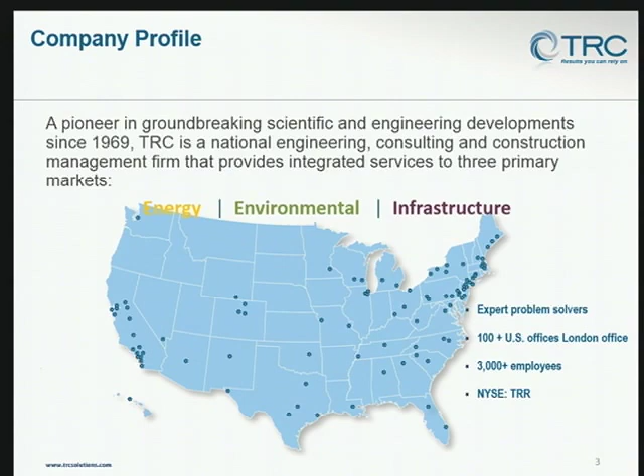3,000 people. Mission, vision, and values — always, safety is number one. I'm going to skip over the rest of this in the interest of time, and get to...

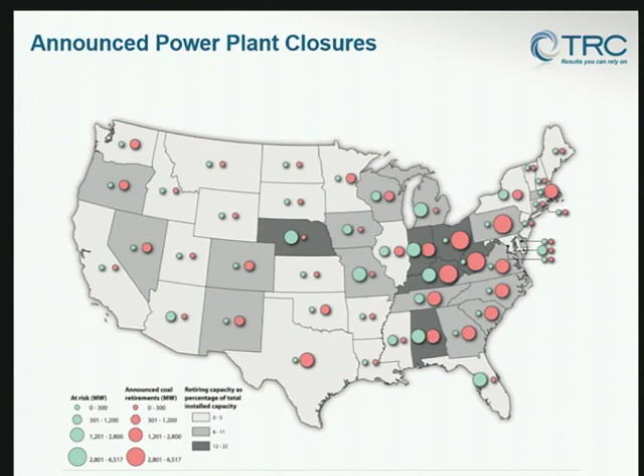Announced retirements of power plants. So virtually every state in the country has got some closures. These markets started on the West Coast and on the East Coast and in Texas, where there were oil burners. Economics is a major driver. Oils are more expensive than coal or gas, so the oil plants got closed, tended to be closed first. The market is 150 sites, more or less — that number has stayed constant over the last 2 or 3 years. 500 units, so a unit is a boiler and a turbine, and a site is a site.

If you use EPRI's decommissioning numbers, 15 to 20 million a site, it's a $2 billion market, which means it will cost the utilities or the owners of those plants something like that to get through the process of decommissioning, should they do that. Economic drivers are gas prices and heat rate. The heat rate in a coal-fired power plant is 10 or 11,000 BTUs a kilowatt hour. I think the Siemens turbine is down below 7,000.

So there's technology drivers, there's a cheap gas driver, and there's, of course, regulatory drivers, which we have tended to focus on. But the thing that's causing these plant closures is cash. As a friend of mine likes to say, the answer is cash — what was the question? The peak closure years, and by closure I mean shutting plants down, likely to be 2015-16, coincident with the MATS deadlines for compliance. And all these plant closures are a major driver of transmission projects throughout the footprints that they serve.

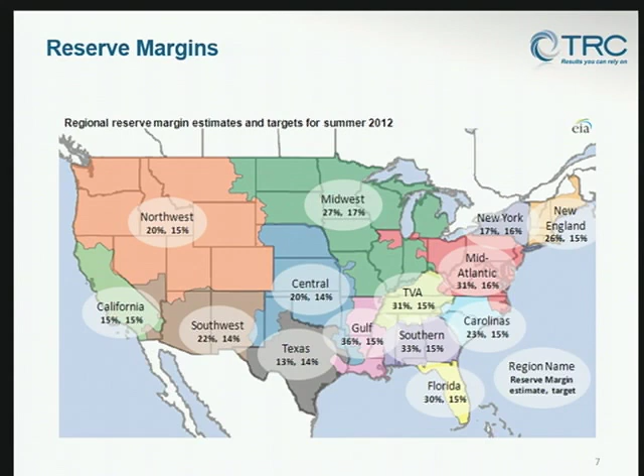Just a word on reserve margins. A lot of discussion — what are we going to do without the 35 or 50 or 70 gigawatts of power? Reserve margins are pretty significant in most regions of the country, with the exception of California, Texas, and New York. When all the coal plants close, gas goes into curtailment, greenhouse gas kicks in, these numbers are going to change. But right now, the reserve margins are significant, with the exception of California, Texas, and New York. Transmission system impacts.

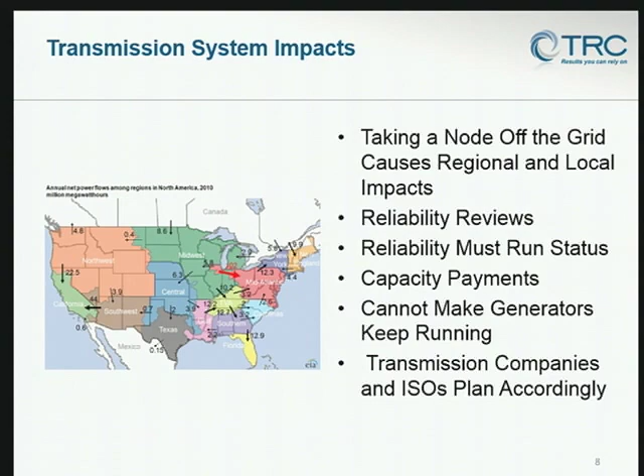Transmission companies and ISOs plan accordingly. So we do a lot of transmission work for investor-owned utilities, and every once in a while they'll complain, 'Oh my, such and such a plant is closing, we have to spend $100 million to upgrade the grid so that the customers have reliable service.'

Polar vortex. I had the good fortune to be on a plane from New York to D.C. to Columbus and back to Philly during the polar vortex, and every single one of these old oil burners or coal plants was running, and running hard. So, of course, after the rules kick in, they may not be able to do that. So people say, well, what's going to happen?

There were planned outages of something like 35 gigawatts of capacity that could have been running, but they had planned closures, so they were not running at that time. That's probably a good thing. The capacity was out there; it just wasn't available at that time. That could be solved by better planning.

Gas curtailment. That's a tough issue. If residences need the gas to stay warm, how do you get gas to power plants if the residents are using all the capacity? That's a gas pipeline and storage issue.

The utility markets and the commodity markets, gas went from $3 or $4 or $5 up to $100. Now there was a cap of something like $20, and people in the market said, well, they can't go through the cap, and the traders said, you want the gas? It's $100. You don't want the gas? It's not. Don't take it.

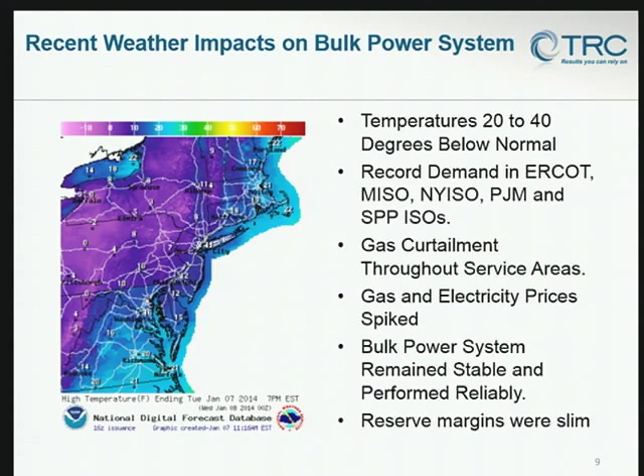You can't say it's not going to happen again. It could happen in the summer. It could happen in the winter. But there's work to be done there.

111D rules we've heard a lot about. I'm going to skip over this slide.

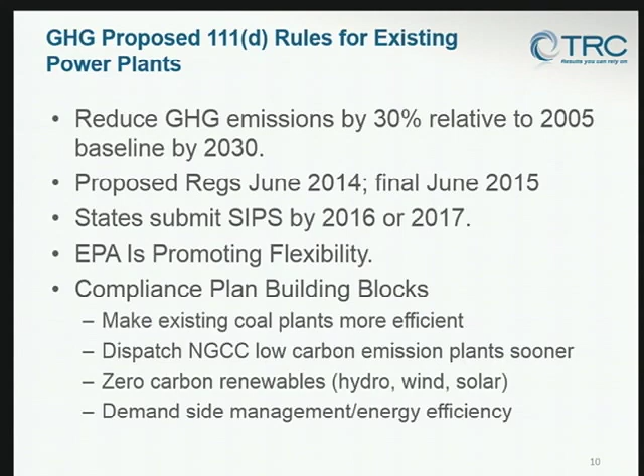And I want to talk about our repower initiative. TRC has been in this market of transforming aging power plant sites since about 2001. We entered into a contract with Con Edison to close a plant in New York City. It was really a real estate deal as part of a big insurance contract, and that was the first one we did. It was a great project for everybody.

It was a big real estate transaction. It was a big contract for us. There was development on the back end of it, so all the pieces fell into place. And since that time, we have done 22 projects in one form or another: 15 as an owner's engineer, 5 as a prime.

One of them was interesting. It was a mercury boiler up in Connecticut. Those are all finished. There's a whole other series of projects where we're acting as the owner's engineer. Some of them are in progress. Some of them are new.

We tend to package the deliverables into 3 or 4 different buckets. The first deliverable we call a playbook. Other people might call it a basic engineering package or a front-end package, but what we try to do is get the existing information that the owners have into an organized format so they know what they have, and then we'll go through an analysis and give them scope of work, cost estimate, schedule for reasonable scenarios that the clients might be interested in, and that can be done in 2 or 3 months, and the results are useful for decision making.

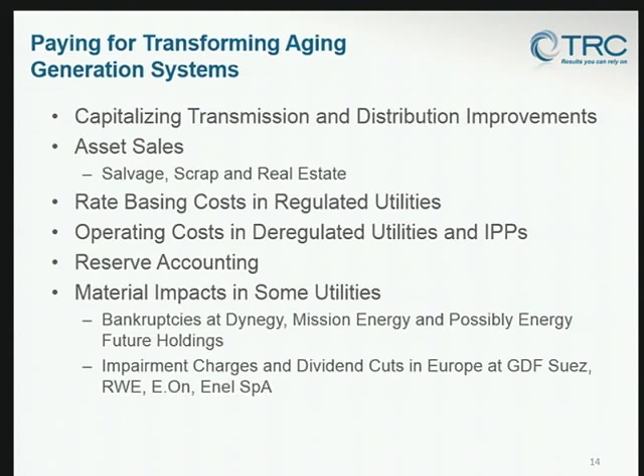So just to drill down into a little detail, playbooks are based on these TRC deliverables for power plant closure projects. Playbooks tend to be a $120,000 contract, taking 2 or 3 months to execute based on existing information.

We'll look at available asbestos and hazardous materials information, transmission and other utility issues, and asset valuation. We develop a matrix of permits required to close the site and/or keep operating it, depending on what you're interested in doing, along with a phase 1 environmental site assessment, and we look at constraints on means and methods.

When a plant is being taken out of service, there are always four impacts: noise, dust, vibration, and trucks. If any of those issues constrain means and methods—whether you blow it up, pull it over, or pick it with a crane—you may not be able to use all of those methods, or use them on the entire site. So we look at those constraints, since they always affect the price and the schedule.

We look at community impacts and future use scenarios, which is always very important. If there are realistic scenarios, we develop them into cost estimates and schedules so you can make an informed decision about what to do next. These kinds of packages are useful for groups like boards of directors or public service commissions so they can see where the costs are coming from.

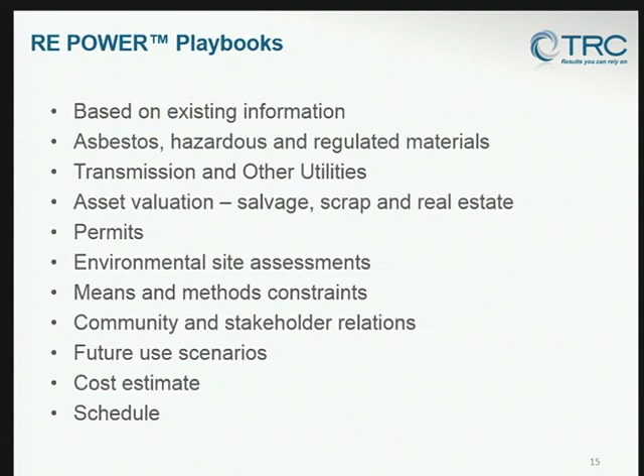The next level of detail is what we call engineering during decommissioning. There needs to be an asbestos survey, and it's helpful to have a hazmat survey. If you don't do those things, you can assume everything is asbestos and pay an abatement contractor to treat all the insulation as such, or assume nothing is asbestos and pay for change orders when you find it. Neither of those is desirable, so we always recommend a thorough asbestos and hazmat survey.

We develop a set of plans and specs for abatement and demolition, and give that to our clients as a bid package. Going down the road, there need to be some work plans, and there are permits that you need to get.

We think it's always good to engage the community and tell them what's happening. They may not care, or they may care a lot, but most communities like to be informed. We do that through fact sheets, websites, and presentations. Putting information up on a website is really great for people who worry a lot—if they want to know what's happening, they can just log in and find out.

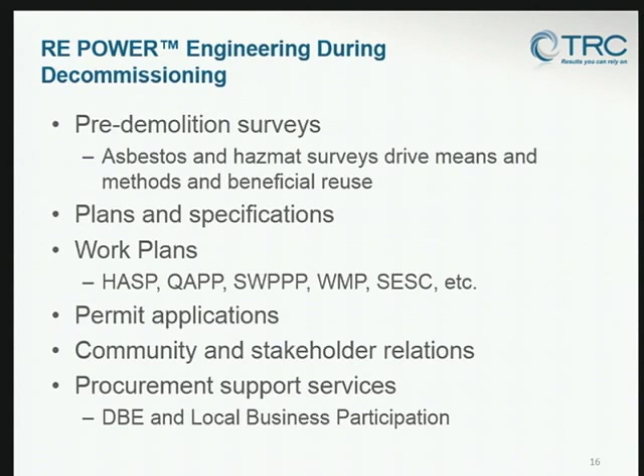Construction support services, this is something the owners can do themselves, they can hire a contractor to help them with it, or they can do it together. But it's really difficult to just turn a site over to a demo contractor and let them have at it. They're going to do what's good for them. They may not do what's good for you.

But project management, site management, contract administration, change management, health and safety inspections, environmental inspections, and at the end of the day, you may need a document package to record what was done on site, trucking manifests, air monitoring, asbestos monitoring, and so on and so forth.

Something else that needs to be done, and then asset recovery is the one issue that seems to consume more time than anything else during the bid process. What we tell people to do is think about what you would pay for the salvage equipment that's available on site. Some of the equipment, air compressors, fire water pumps, house boilers, control systems, what would you pay for it if somebody else had it for sale?

So the best market seems to be internal within the companies. If there's no market for this kind of equipment in-house, it's probably not going to be much of a market out in the marketplace. There are auction houses, I call them like garage sales, and people literally come in and say, I'll give you $5 for that warehouse full of spare equipment. It's really a tough and frequently disappointing exercise. There's a lot of litigation with auction houses.

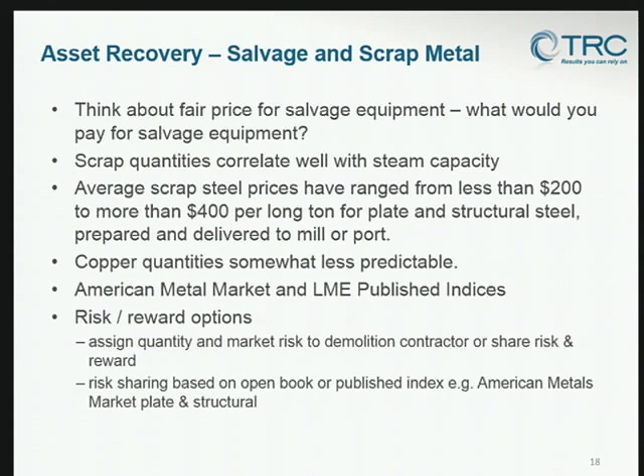I'm going to go through some projects, and I think we're okay on time.

So this is an old slide that I've given many times in these kinds of presentations, but this is a Con Ed site in New York City. It was on First Avenue, just south of the United Nations, to give you an idea of where it's located. This was an MGP site, then a coal-fired power plant, then an oil-fired power plant, and finally it was converted to gas before it was closed in 2000. Well, it was supposed to close in 2003, but they didn't close it until 2005. It was actually two power plants, 3 million pounds an hour of steam.

And there's been some development on the site. There's a school and a couple of apartment towers, the school is in session, the apartment towers are in construction. The other development has lagged, not for any particular reason.

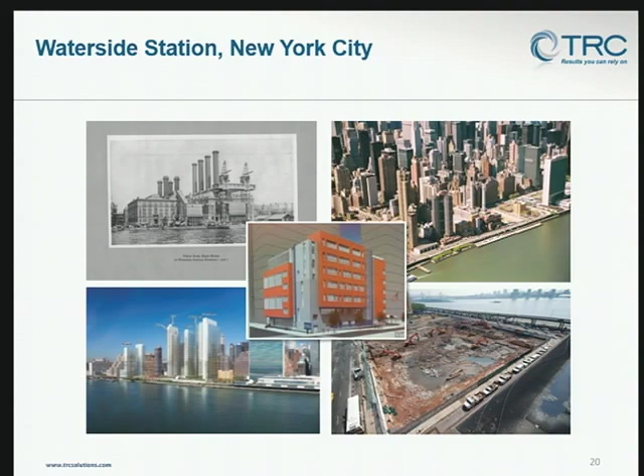One of the other interesting things about this site is there were 7 intake and discharge tunnels, which were very deep, and the top of the tunnel was always below the level of the East River, so they were difficult to get out. We said, hey, we'll close them in place. They said, well, we want to build skyscrapers, we don't want to deal with these old tunnels, so take them out. So we took them out, but it was tough, tough to get out tunnels that are underwater.

Hunters Point and Humboldt Bay, San Francisco. Here again, these were oil-fired power plants.

In California, there's always the dirtiest plant in California. Hunters Point is on the waterfront, part of a huge redevelopment zone.

It was 400 megawatts. PG&E broke it up into pieces: above ground demo, below ground demo, and then cleanup. You can do that, it just takes longer, it costs more. So we were the prime on this. We did the engineering, we hired the subs. The project was done in 2010.

Humboldt Bay is up at the end of the line in Eureka, California. This was an oil-fired plant and a nuclear plant. We did the thermal plant. They just awarded a contract for the nuclear side last year. I guess that's going to also be closed.

No future use at this time, but the San Francisco site is part of a very, very large redevelopment area.

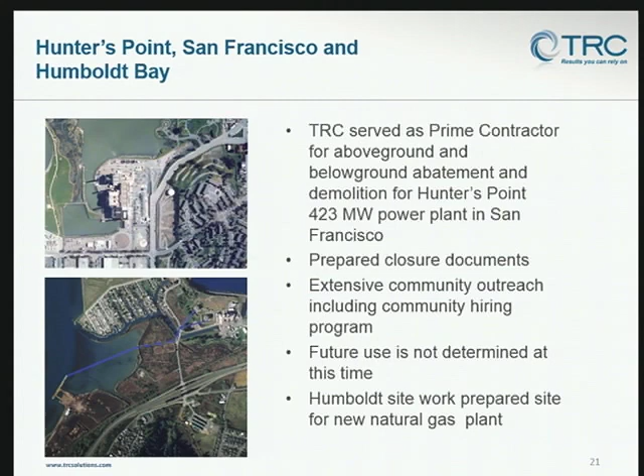Austin, Texas. So this was a plant, 570 megawatt power plant in the city of Austin in an environmental justice neighborhood. People have been trying to close this plant for many, many years. In 2007, Austin Energy, a municipal utility, finally said, okay, we agree, we're going to close it.

So we won this competition, and there were a lot of requirements. It's finished. It was finished the end of last year.

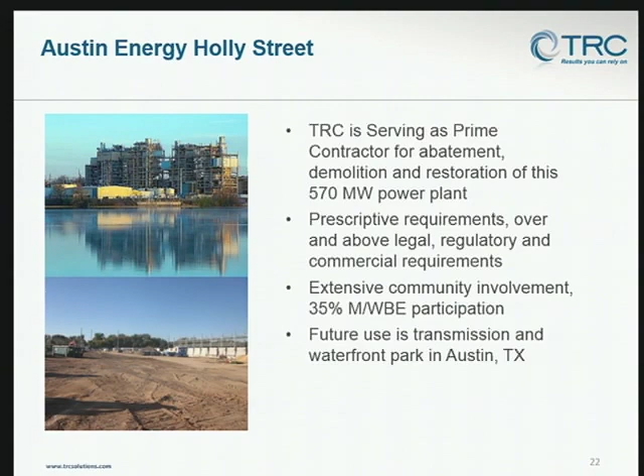The lesson on this plant is what happens if you have a bad asbestos survey. Containment went up, clearance was granted, containment came down, and then we peeled the skin off the boiler and found, guess what, lots of asbestos. That created a delay and a change order, but there's a need for a thorough asbestos survey on these projects. Big DBE component, 35%.

Contractors, they were all great. We're going to talk about Long Island, which is, of all places, kind of a laboratory for repowering. Right now there are 5 projects on the island in play in one form or another.

Glenwood Landing had 200 megawatt towers and then these old Riley boilers in the brick building. This side is being demolished at this time. There are peregrine falcons, there are state historic preservation issues. Just because you say you want to do it doesn't mean you can go ahead and do it. You've got to deal with all these ancillary issues that pop up.

It's almost done. The driver on the Glenwood Landing site was property taxes, which were north of $20 million a year. Same thing on Barrett and Port Jeff, and for the time being those taxes could be passed back into the rate base, but that was going to end. So there was a need to close these facilities and get them taken down on a time schedule.

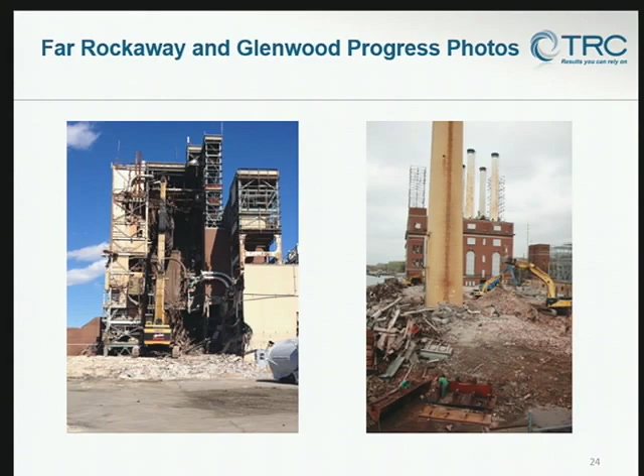Then there's Poletti. It was sort of a bargaining chip. This is an 850 megawatt plant that Con Edison started to build in the 70s, sold it to the New York Power Authority, a state institution. Governor Pataki wanted a state-of-the-art, air-cooled condensed, gas-fired combined cycle power plant, and the environmentalists in New York State said, you want a new plant? Close the old plant. So there was an agreement struck to do that.

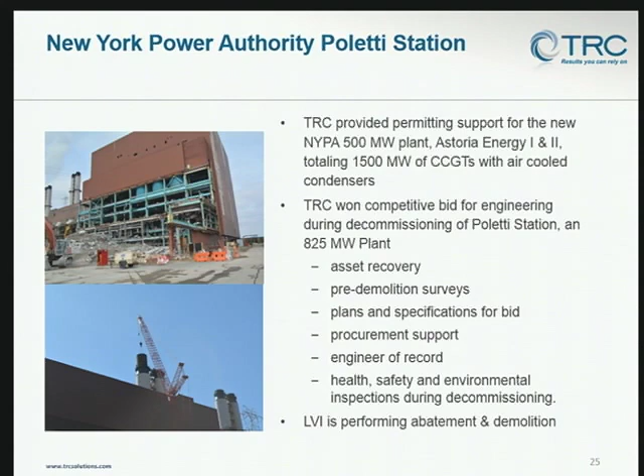The new plant's been up and running for quite some time, and whenever it's available it just runs flat out. The old plant is currently being demolished. Probably be done in the 4th quarter of this year.

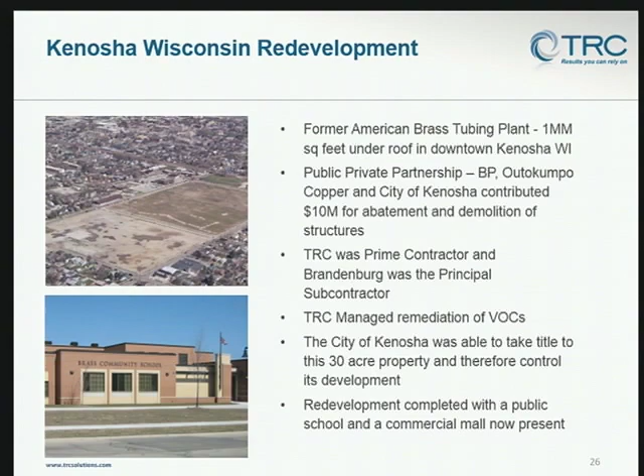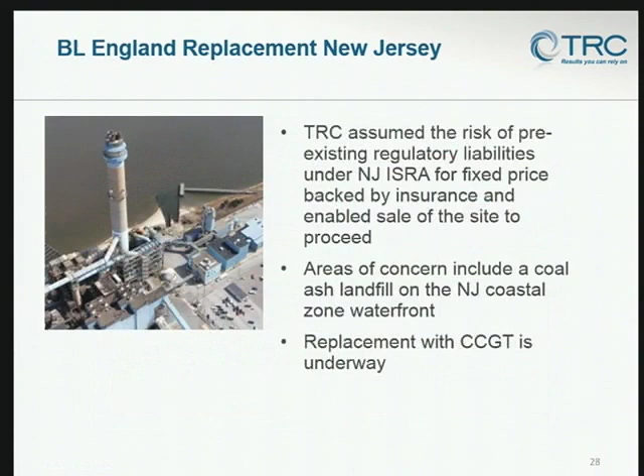That's all I got. These are some other example projects. Anyway, if there are any questions, I'm happy to answer them, and we'll keep this show on schedule.

Thank you. Any questions? I'll be here. Looks like you'll get a question maybe at the break. Okay, great. All right, thank you. Fair enough. Thank you, Ed.

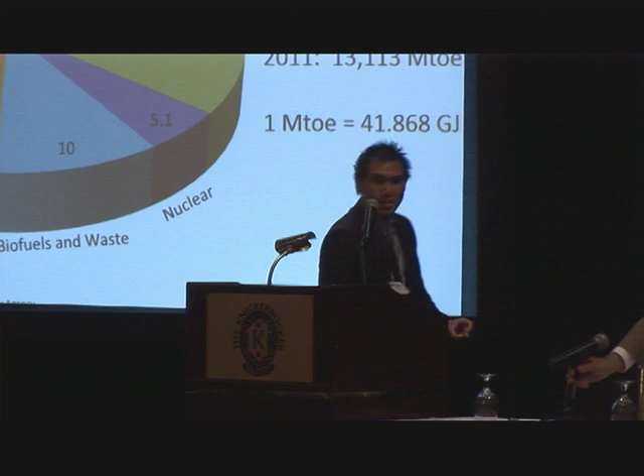So chemical looping is an interesting technology. This presentation will differ from all previous presentations because chemical looping is still most definitely a technology that's being developed, but every sign does show that it can lead to commercial scale demonstration operations. Currently, as all these chemical looping projects occurring throughout the world continue to scale up successfully, this technology does have the ability to completely transform how fossil fuels are utilized.

First, though, it's important to take a global perspective of how energy is consumed. If you take a look at this chart, it's very obvious that fossil fuels dominate our primary energy source. Given the current portfolio for energy - oil, natural gas, and coal - comprising about 80%, it's very clear that for the near future, fossil fuels, carbonaceous fuels, will continue to dominate. The world is not decarbonizing our energy, and we aren't shifting towards renewables to any great extent.

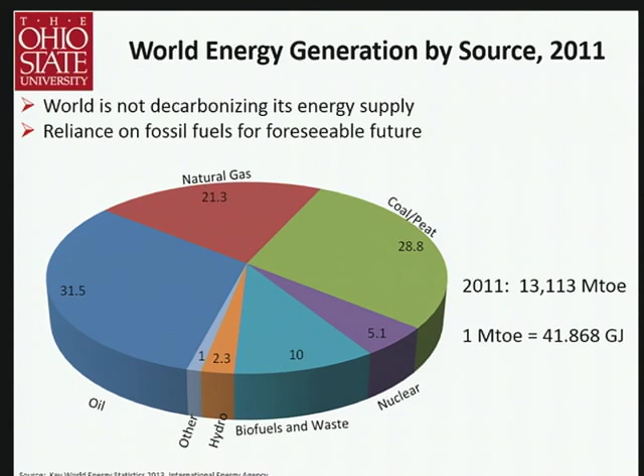Now, I realize that CCS, CCUS, CCGS, CCUGS, whatever you want to call it, is not a viable option for reducing CO2 emissions in its current state due to economic challenges and difficulties. However, that doesn't mean that in the future it can't be or won't be, as research continually develops and advances.

So everyone here knows the purpose of CCS. Tom and Jordan did a fantastic job yesterday going over the details of what the DOE is doing in terms of CCS. But the overall strategy does require government regulation and technological advances in order for CCS to be viable. In terms of government regulation, the US EPA mandates and proposals have been discussed in great detail. But internationally, the European Union has also set up the emissions trading system for CO2.

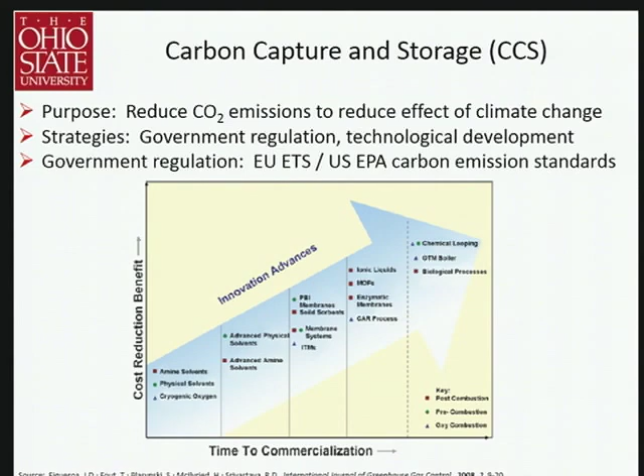So now, what is chemical looping? It's simply a cyclical process where a chemical reaction is divided into several subreactions using intermediates. There are two types. One is purely for CO2 removal, and the other uses a metal oxide carrier particle for oxidation reduction. In terms of CO2 capture, it's typically a metal carbonate, typically limestone. It's calcined, and then a pure stream of CO2 is emitted, while the metal oxide reacts with the CO2 in the flue gas to form the metal carbonate, and the cycle continues.

In terms of the redox cycles, what happens is a metal oxide reacts with the fuel, and depending on the metal oxide composition and the reactor type, you can get a variety of products, including syngas at any hydrogen to CO ratio you want - you just need to play around with the particle, play around with the fuels. You can get electricity through complete combustion, you can get hydrogen, you can get liquid fuels. It just depends on how you decide to set up your reactor system. What you see is just a complete redox cycle between the metal oxide and the reduced metal.

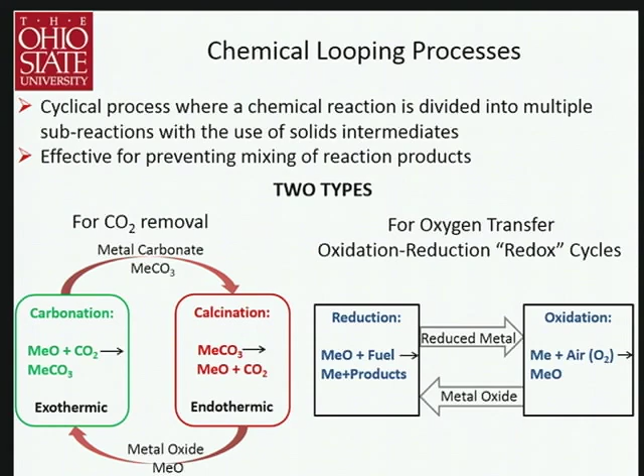The main benefits - there are several of them for chemical looping - is that it is an inherent CO2 capture technology. You don't need an amine scrubber, you don't need any back-end sort of CO2 removal system. It by itself is inherently a CO2 capture technology.

It provides a highly efficient method for coal and natural gas utilization, where efficiencies can range between 50% and 80%, depending on what products you want.

It's fuel flexible. Throughout research throughout the world, it has tested biomass, coal, natural gas, lignite, pet coke. Everything has been tested. And it's also product flexible, where if you want syngas at any hydrogen to CO ratio you desire, it can be achieved. You can produce electricity and value-added chemicals.

The challenge is the particle development. The greatest barrier and the number one failure for chemical looping systems is the particle. DuPont had a maleic anhydride chemical looping system, but it failed because their particle, over time, failed to continue to provide the oxygen, so they just eventually ended up using an ASU.

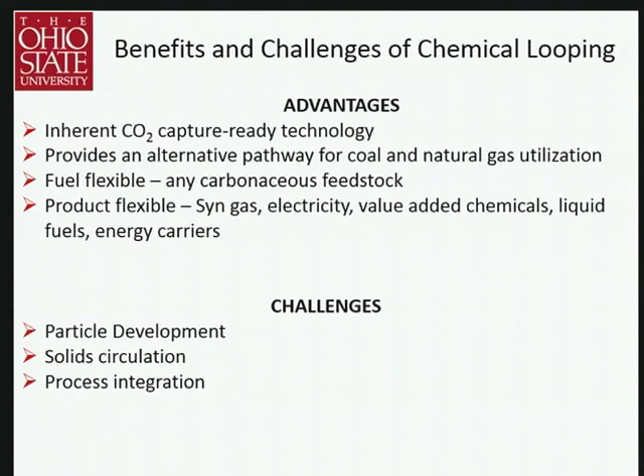The idea of chemical looping isn't a new idea. In the 1900s, the Lane and Messerschmitt process was actually a chemical looping system for hydrogen production, very similar to what we are using today for our hydrogen production as well in a chemical looping system.

The first reaction, the top one, is simply the steam iron process. The bottom reaction is the reduction of Fe3O4 back to Fe using CO. The net reaction you can see is a water-gas shift reaction, but since you broke it into two intermediate reactions, there's no need for a water-gas shift catalyst. There's no need for breaking the equilibrium or trying to shift the equilibrium, because there is none. It's inherently performed through the chemical looping system.

And then in the 1970s, Consol Energy had the CO2 acceptor process, and what they were trying to do was use calcium oxide both as a CO2 carrier such that the water-gas shift reaction could move in the forward direction. Plus, since it came from the calciner, which was at a higher temperature than the gasifier, the calcium oxide also provided heat to the gasifier as well.

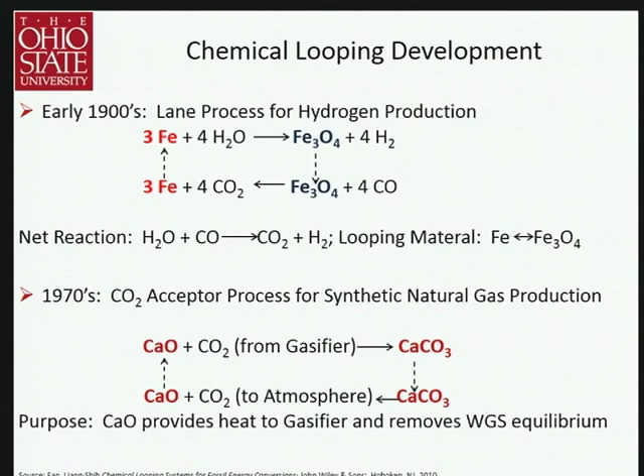So again, there are two types of chemical looping systems. The first one is for CO2 removal, and this has been studied heavily using carbonates, usually naturally occurring carbonates. RTI used sodium carbonate. The Europeans actually have scaled up their process to a 1.7 megawatt thermal plant in Hunosa, Spain, using just pure plain limestone, not doped or anything, just limestone from the ground. And what we do at Ohio State is we actually use calcium hydroxide, so we provide an intermediate reaction step to convert the calcium oxide to calcium hydroxide, and I'll go into that a little more later. Additional solids include hydrotalcites, and magnesium hydroxide as well has been studied.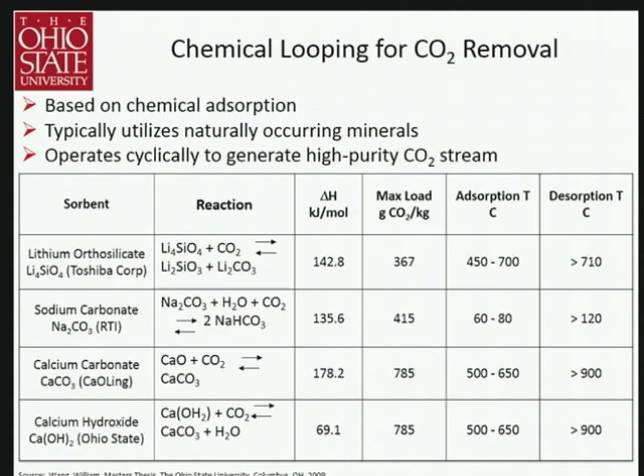So at Ohio State, we have chosen calcium hydroxide because what we've noticed is that calcium hydroxide is far more reactive than calcium oxide over multiple cycles. Calcium oxide is known to degrade in cyclical fashion for CO2 capture, while calcium hydroxide has shown steady CO2 removal. So it's a three-step process, three reactions, all at high temperature.

The calciner is where everything starts to form the calcium oxide. That is then hydrated using steam around 500 C, which is an exothermic reaction. So quite a bit of heat is provided through the hydrator at 500 C. And then in the carbonator, that's where the CO2 capture occurs, and then it continues in a cyclical fashion.

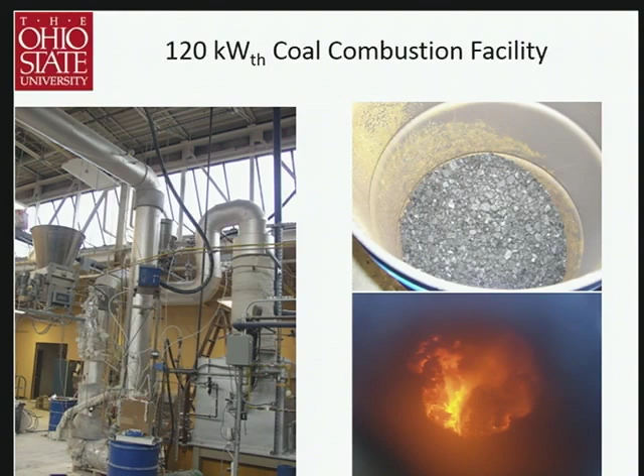We demonstrated this at the 120 kilowatt thermal scale at Ohio State using a coal-fired stoker donated by Babcock and Wilcox, and using direct injection of calcium hydroxide and several other oxides into our flue gas to see the removals. This is the stoker grade Ohio coal, and this is the coal flame.

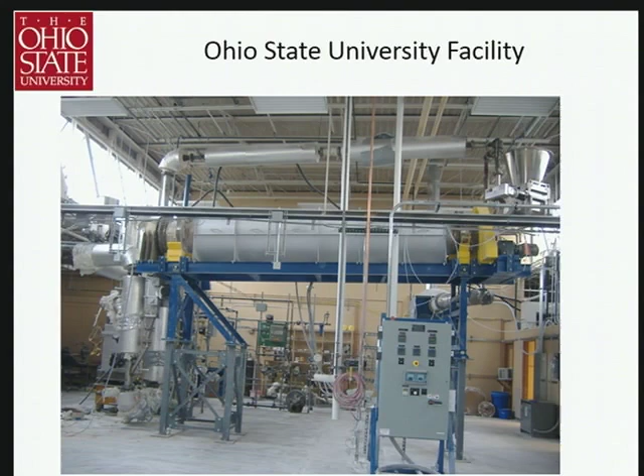What we were able to achieve is 90% CO2 removal at a calcium to carbon mole ratio of 1.3. This can be compared to natural limestone tested by the Europeans, where they need a 10-to-1 calcium to carbon mole ratio for 90% CO2 removal.

Because of the high calcium to carbon mole ratio and the carbon to sulfur ratios, we get 100% SO2 removal using calcium hydroxide, even though we're at temperatures far lower than furnace sorbent injection, and that's just because the calcium to sulfur ratio is at least 50-to-1.

In the carbonator, the residence time is on the order of seconds to achieve 90% CO2 removal, and we've been able to sustain the reaction for several cycles.

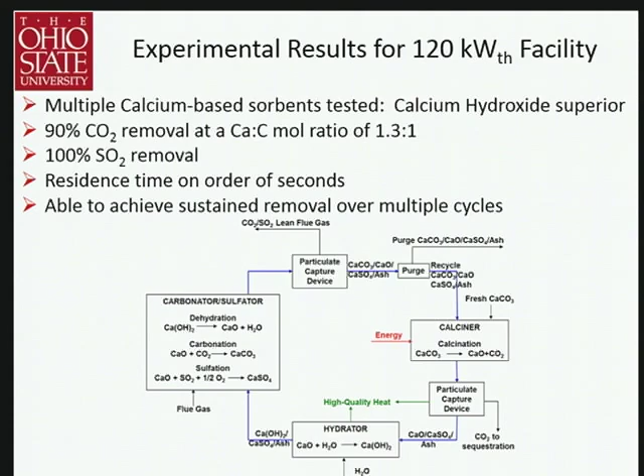This is just a simplified process flow diagram of what is circulating through the system and the energy inputs and outputs.

I like to call this slide 'what I did over the summer.' In order to see the effect of process parameters on the carbon capture process, the CCR process as we call it, in terms of energy penalty and materials consumption, I started out with case 11 of the DOE baseline report.

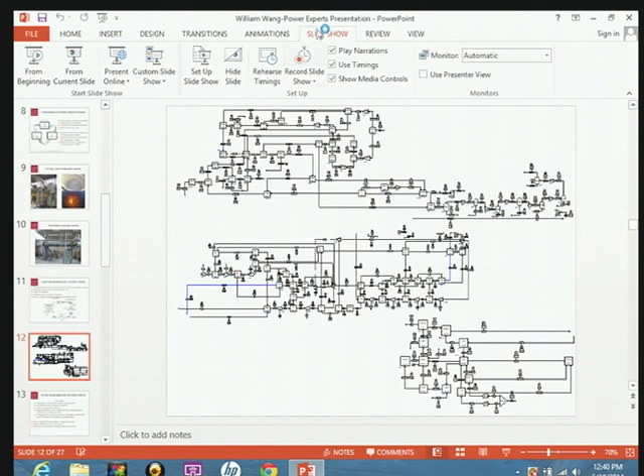So this is the coal-fired boiler here. I apologize, I had to break this up and it's still incredibly small. Coal and air are fed into here, and then flue gas comes out. This is the steam turbine cycle. Again, this is for the supercritical case, case 11, along with using the QGESS standards put forth by the DOE.

And then up here is the actual carbon capture where the flue gas comes in, and then this is the CO2 compression. This is the calciner, which operates in an oxycombustion mode, per the standards of the oxycombustion report put forth by the DOE, as oxycombustion calciners haven't really been developed yet. And then the hydrator obtains steam from the intermediate pressure and low pressure interchange.

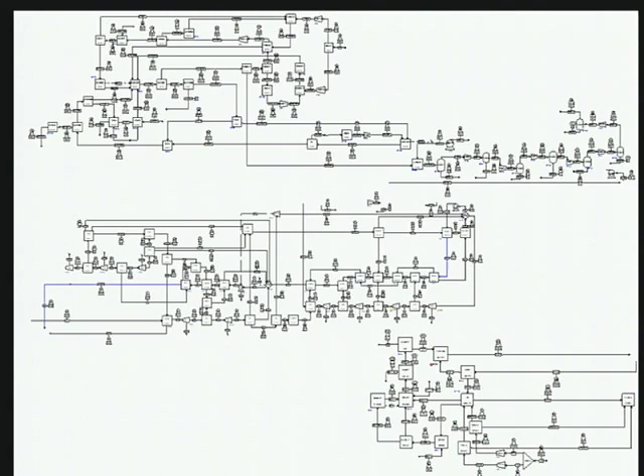So the advantages of using this high temperature carbon capture process is that it uses limestone, which is about $25 a ton, very cheap if you get it closer to the mine. Because of the high calcium to carbon mole ratio of 1.3 to 1, our simulations show -- we haven't formally demonstrated it -- but all acid gases are removed, SO2, SO3, HCl, just because of the trace amounts present and the high amounts of calcium circulating through the system.

The process integration is flexible, where you can use either high temperature or low temperature flue gas. You can take steam from either the intermediate pressure or low pressure interchange, and if vacuum compression or vacuum heat exchangers are developed better, you can also take it from the exit of the low pressure steam turbine, but it is under vacuum at that point.

The energy penalty, steam consumption, and oxygen consumption are all lower than amine scrubbing and oxycombustion. Under the very worst case scenario, the energy penalty is around 25%, but it's usually lower, 15 to 20%, 15 to 25%. That's again because of the amount of high pressure or high temperature heat available through hydration, the heat of reaction for hydration, and the cooling of the flue gas from the carbonator coming out at 625 C down to stack temperatures.

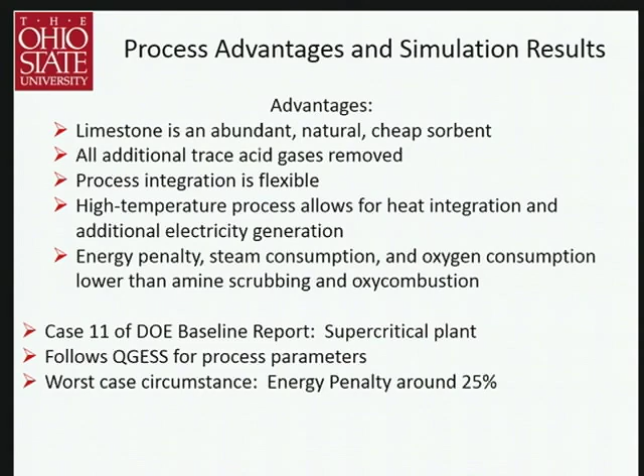The second type of calcium process is a pre-combustion one, where the calcium hydroxide now actually serves two purposes. One, it provides the steam for the water-gas shift reaction upon decomposition. Second, it breaks equilibrium by capturing the CO2 and driving the reaction forward. Under the correct operating conditions, no catalyst is actually necessary to obtain high kinetics and high conversions to hydrogen.

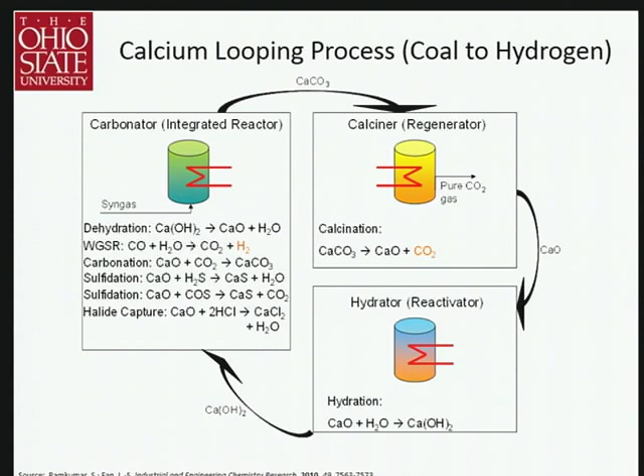That is the only difference -- the calciner and hydrator remain the same. It is also a process intensification: this is a typical coal-to-hydrogen process, or IGCC process, where you can see all this is necessary, but because of the reactivity of the calcium hydroxide, it's reduced to this, where the calcium looping process, the three-reactor system, replaces everything here.

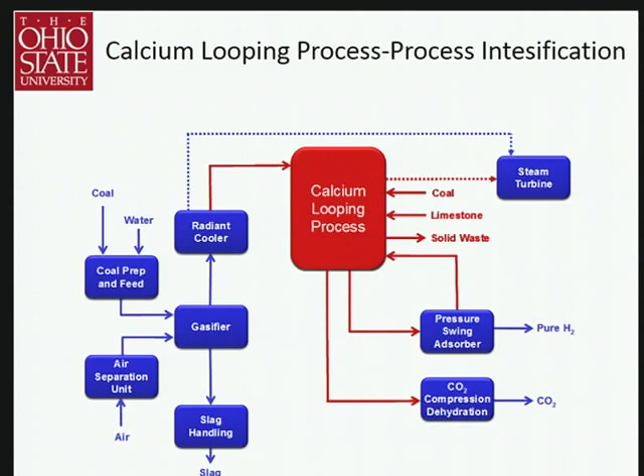Consol Energy did an independent Aspen simulation and economic analysis with our input, and they also had to make a lot of additional assumptions because they were producing so much extra electricity, they didn't know how to handle that. So the total first-year cost of electricity is about $92 per megawatt hour, as opposed to the coal-to-hydrogen-based plant. It is the lowest cost route for hydrogen production with CO2 capture: steam methane reforming plus the CLP process.

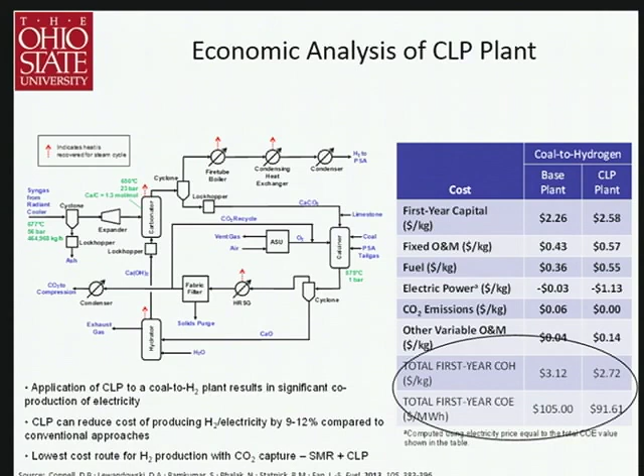Now, the more flexible and more interesting type of chemical looping is the redox one, where you have a metal oxide reacting in a cyclical loop, becoming metal oxide and metal. This is just a schematic where you can see the metal oxide enters, and then the reduced metal exits -- there should be an O here. And basically, you can produce your syngas, you can produce complete combustion products, you can produce chemicals.

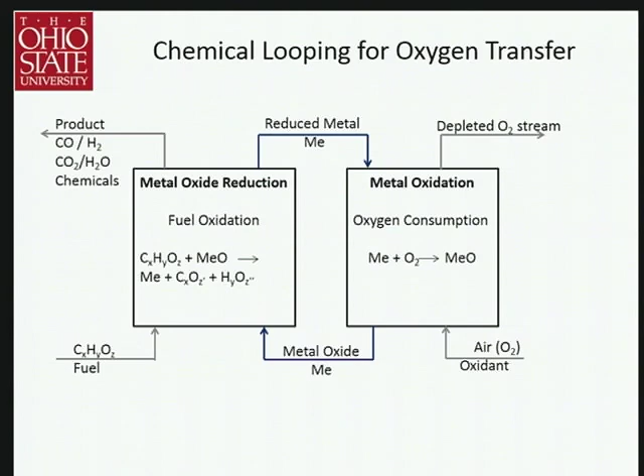What you can see over here is it's still combustion, it's just that the nitrogen is over here and the CO2 is over here, so there's no dilution of the CO2. It's inherently a CO2 capture process. Again, the most critical factor for success in chemical looping is the metal oxide.

The initial composition is based on thermodynamics, and then you have to go into kinetics. What's also interesting is there is a subset of metal oxides, such as copper oxides, that upon heating will provide gaseous oxygen, as opposed to iron oxide, which remains lattice oxygen donation. So depending on if you need gaseous oxygen or lattice oxygen, you have to make your choice there.

Additional considerations are environmental health effects, cyclic reactivity, strength. Initially, the method for determining what particle to use for the metal oxide was done through trial and error, where they would just take a metal oxide, test it, see if it works. If it didn't work, they would tweak it, maybe add some additives, maybe go to a different one. Now things are becoming more scientific, using density functional theory and reaction mechanisms to determine the type of metal oxide to produce. It's becoming more of a catalytic science than trial and error, which is quite positive.

So far, iron, nickel, copper, manganese, and cobalt are the most common types of metal oxides. You can also go with naturally occurring metal oxides such as ilmenite, olivine, or you can make your own, such as iron oxide doped with something, or any metal oxide.

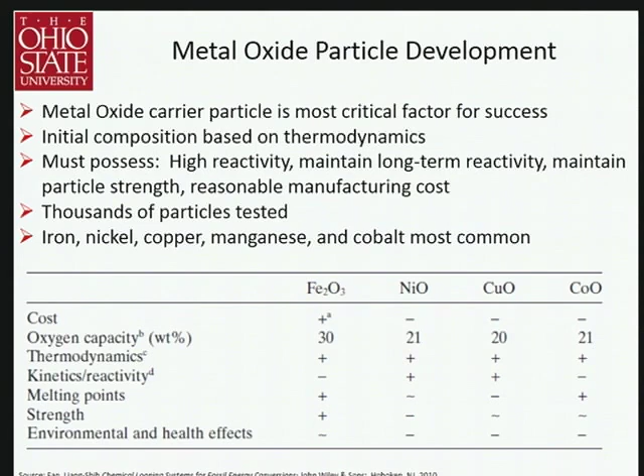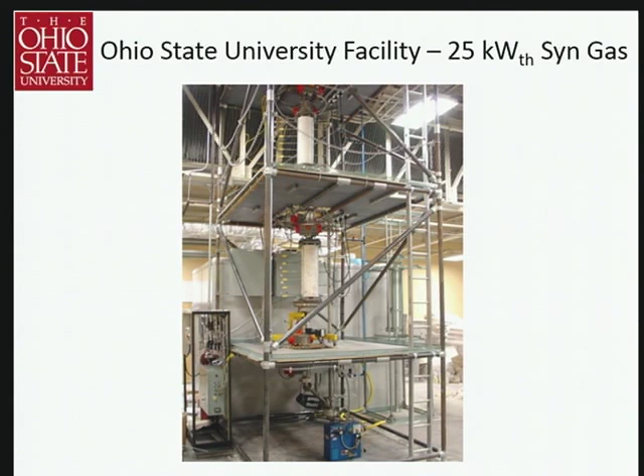This is version 0.0 of our syngas chemical looping unit. It's 25 kilowatts thermal, located at Ohio State University. It has since received significant upgrades.

So this is just showing, again, the idea of chemical looping, where this is syngas combustion to form CO2 and H2O, but it's done in such a manner that the iron oxide does the transfer between Fe2O3 and Fe.

We have tested over 300 hours of operation using all types of gaseous fuels. We've done methane, we've done natural gas, we've done syngas.

What's interesting is also, because we use iron oxide, from Fe you can go to Fe3O4 using the steam-iron reaction to produce hydrogen, and then do a dual-step oxidation from Fe3O4 to Fe2O3 using air. So this chemical looping has the ability to produce hydrogen as well.

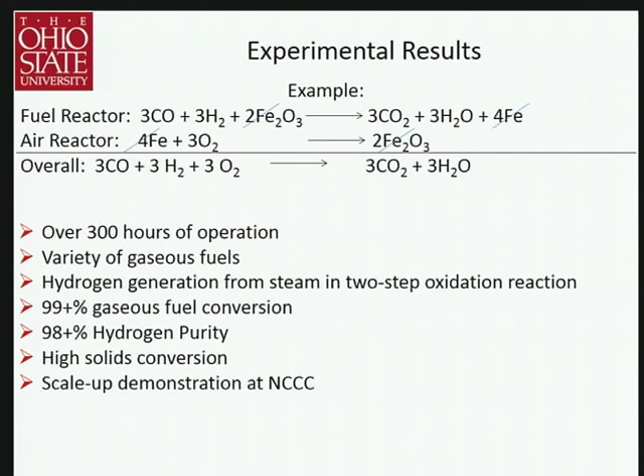High gas conversions, high hydrogen purities, high solids conversion. This is the process that has been chosen by ARPA-E to be scaled up at the National Carbon Capture Center in Wilsonville, Alabama. It's currently undergoing demonstration as we speak.

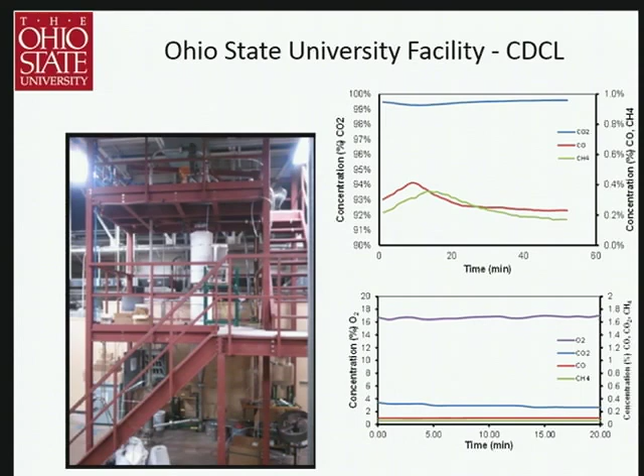We also have another chemical looping-based system called coal direct chemical looping, and that takes coal, reacts it with the iron oxide. Again, you can form carbon monoxide, generate your syngas, generate your hydrogen, generate your electricity. We have been able to successfully demonstrate this for 200 continuous hours with absolutely no issues in terms of solid circulation, conversion, or operations.

We were able to do it for 200 hours continuous in the fully integrated unit. We have tested coal, biomass, petcoke, lignite, PRB. Everything is fully functional. There have been no operational issues.

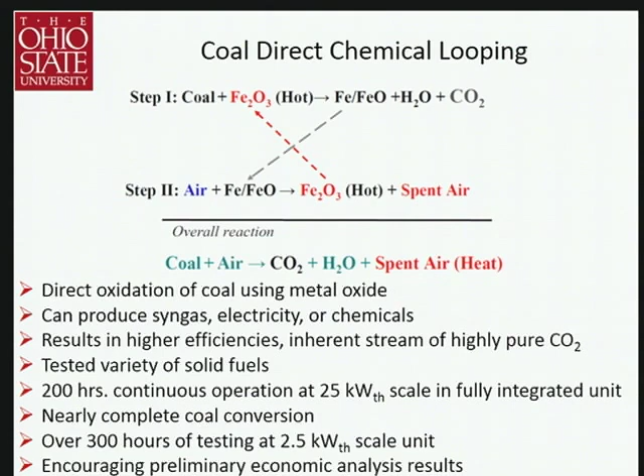And this has the ability, again, to use coal. So this idea of retiring coal plants, there are alternatives that do exist with encouraging preliminary economics. Of course, further testing is always necessary.

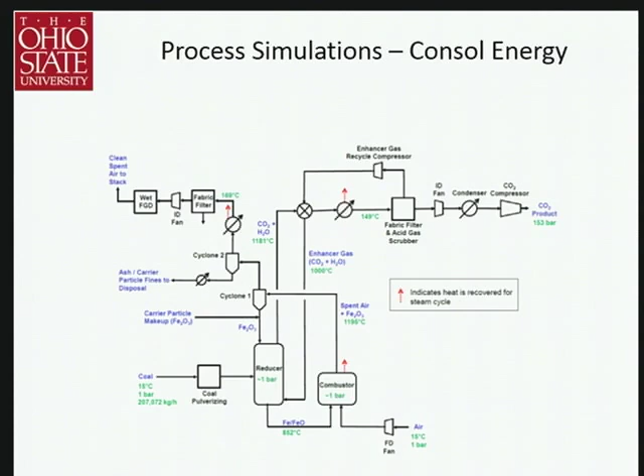Consol Energy has done their own independent economic analysis, starting with their own Aspen simulations using our experimental data. As you can see, the base plant is about 58.9. CDCL plant is about 78.4. It's less than a 35% increase in cost of electricity for preliminary economic analysis. What's really encouraging is that the energy penalty is only 10.6%.

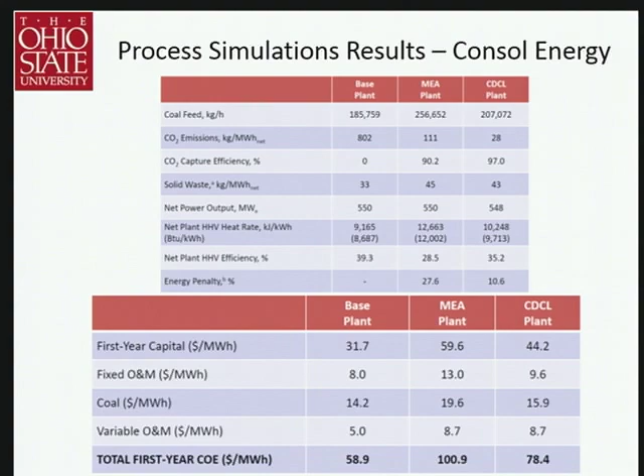In terms of additional chemical looping systems occurring throughout the world, this is the 2 megawatt thermal post-combustion CO2 capture using calcium oxide in Hunosa, Spain, but also Darmstadt University, ITRI, Alstom. They also have large-scale demonstrations occurring as well. In addition, you have universities such as University of Kentucky, University of Utah, and private companies also looking at chemical looping cycles.

So all the results to date are actually very encouraging for continued fossil fuel utilization and transformations in ways that are far from traditional.

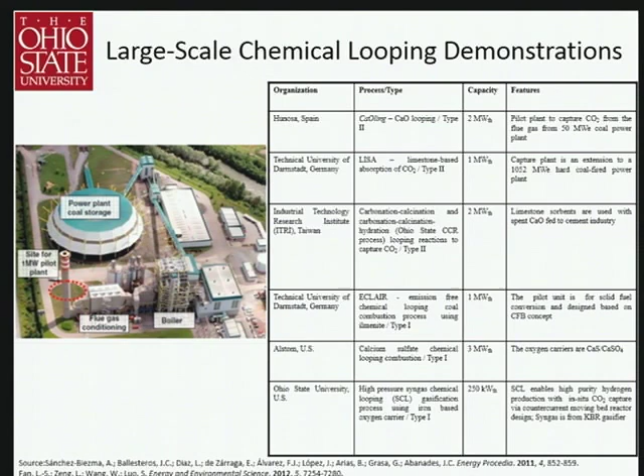Thank you, William. Any questions from the audience? Going once? Going twice? All right. Thank you.

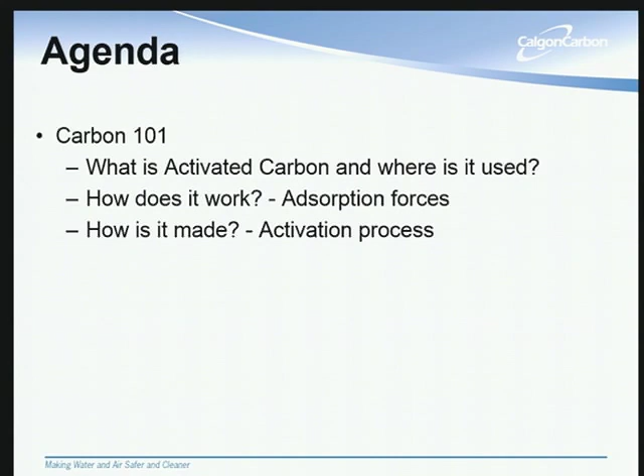Then I'll transition into talking about activated carbon for mercury control, but more specifically applying activated carbon in situations that traditionally have been impossible for it. Situations that include the presence of SO3, for example, situations where you want to preserve the quality of the fly ash for sale to the cement market, and also situations where DSI for SO2 has to be done in conjunction with ACI, which can cause interference.

I'll be illustrating this with some data using Calgon carbon products. I'm not here to give you a sales pitch or a commercial. The takeaway I want you to have from this presentation is that those hurdles I've listed have traditionally prevented the use of activated carbon in many situations, but thanks to advancements in the field, those are being overcome today.

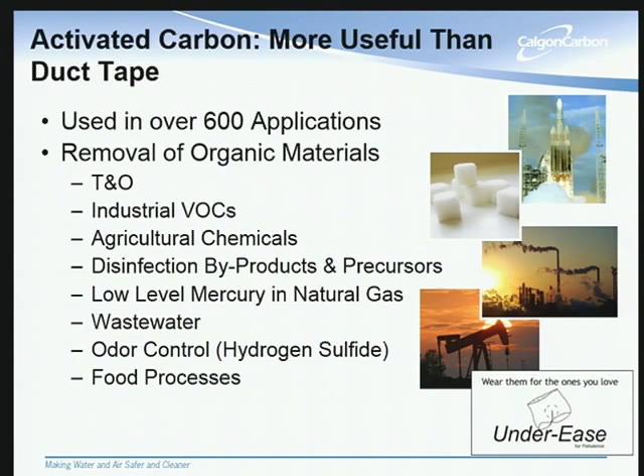So what is activated carbon? It's fair to say that it's largely graphitic in nature. What is graphite? Well, let me back up a step further.

Graphite is found in everything from carbon pencil leads to fighter jets. Now, activated carbon is graphitic in nature, but instead of that high degree of order you have in graphite, it's as if you took those stacked layers and then dropped them - like taking a deck of playing cards and dropping it into a hat, or another analogy is a jar of peanut brittle. You have all these disorganized and jumbled plates fitted together, and it's that disorganization that creates the porosity that makes activated carbon so useful.

In fact, you can find up to a 1 million-fold range in pore size, all the way from visible cracks and crevices down to the microscopic. The old timers back at Calgon Carbon like to argue that activated carbon is the original nanotech. I'm not sure I agree with them on that point, but I get where they're coming from. However, when it comes to adsorption, it's really only the smallest 5-fold range of pore sizes that do the work, that do the adsorption.

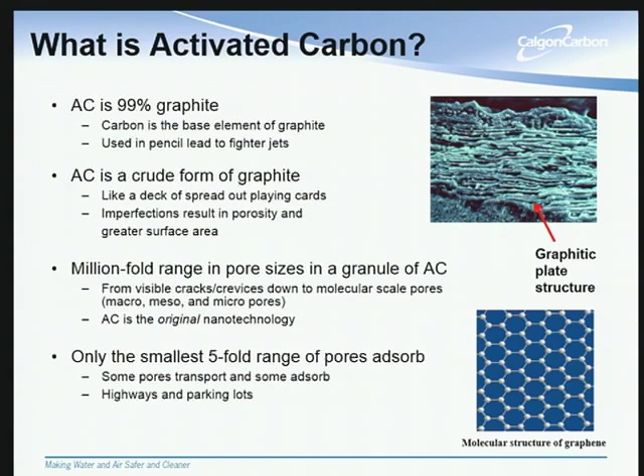There are some pores that do the adsorption, and then there are larger ones that help transport through the particle, or through the granule, to get to those adsorption pores. To use some analogies, we like to compare it to the highway system, where your large interstates and highways are your transport pores. You come off to smaller side roads, which are your finer transport pores, and eventually wind up at your driveways, which compare to your adsorption pores. Or another analogy is a hotel, where you walk into the large lobby, go down smaller halls, and eventually wind up at all your hotel rooms, which again are your adsorption pores.

So when it comes to activated carbon, you'll hear terms thrown around like adsorption and absorption. It can be a little confusing.

When it comes to activated carbon, what's going on here is adsorption. That means when something is picked up by activated carbon, it's sticking to the activated carbon, as you see in this diagram. That's in contrast to the absorption process, whereby a sorbent would actually take something within itself and consequently swell. There are sorbents that do that - for instance, some clays will absorb in that manner and actually swell.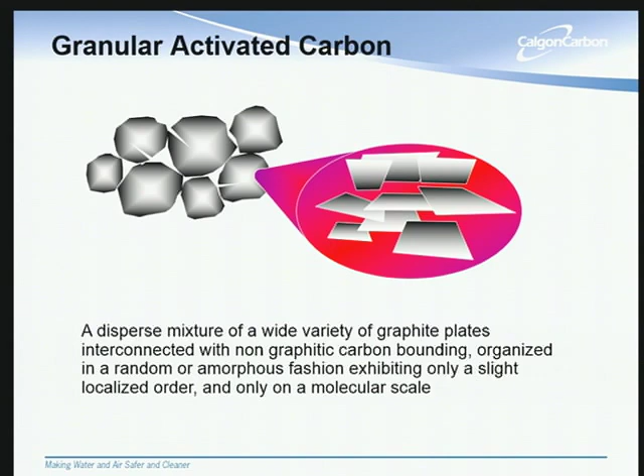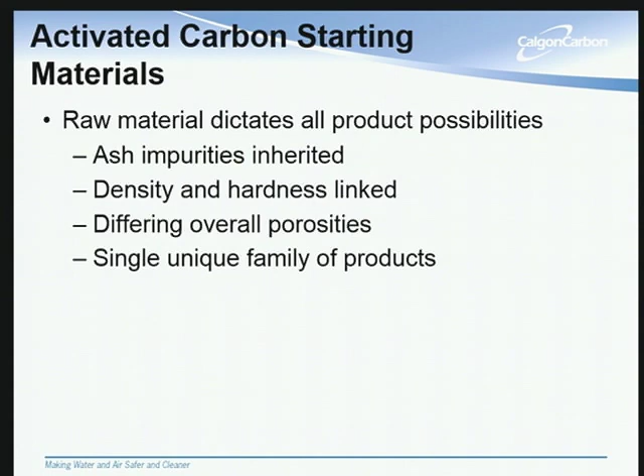Activated carbon can be made from quite a wide variety of starting materials. All you need is something very carbonaceous to start with - that could be coal, tires, or even chicken poop. However, the material you start with is going to dictate the final properties in your final product. The ash impurities are inherited. Density and hardness of your product are closely linked to the starting material. Of course, your overall porosities depend on starting materials a lot. And really, each starting material gives you a unique class of products, so that in the end, what you make from bituminous coal is not the same as what you make from lignite coal or coconuts or wood or what have you. We'll talk a little bit more about that later.

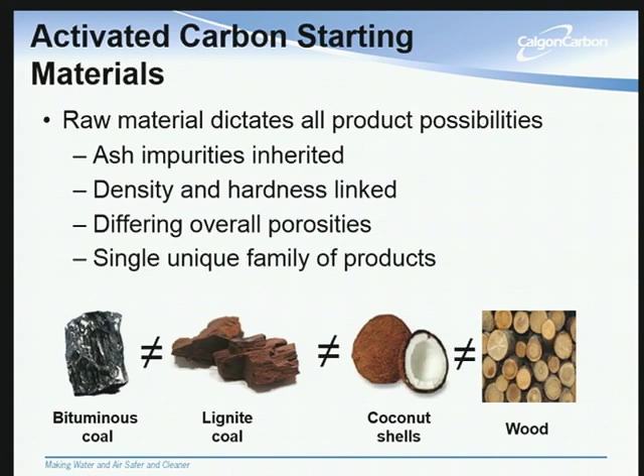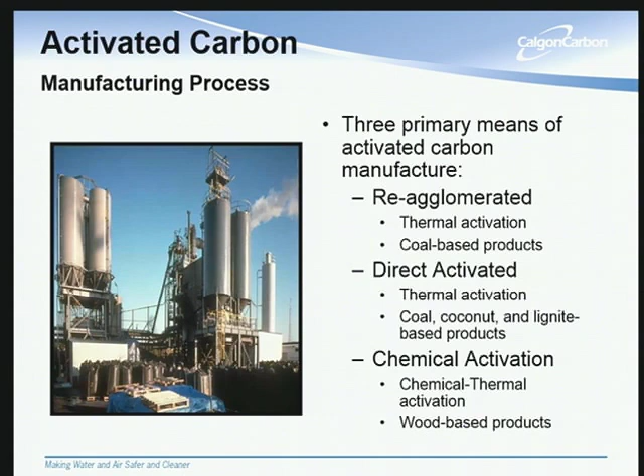How do we make activated carbon? In a nutshell, there are three different ways to do it. At Calgon Carbon, because we use bituminous coals, we rely on a process we call reagglomeration, and that involves a thermal activation at the end step. You can skip the agglomeration step and do what's called direct activation - that's also a thermally based activation. And then thirdly, there's also chemical activation, but something I won't really delve into today.

By contrast, with direct activation, they skip this reagglomeration step. In certain cases, depending on your starting materials, you can even skip the baking step and go straight to the activator. In the end, you come out with this nice black product. We have this horrible joke in the activated carbon industry that we can make carbon in any color you like, as long as it's black. But what you have is a granular product, all the VM driven out, very high surface area and porosity, and very inert material.

I understand it was stated yesterday that there's a risk of explosivity with activated carbon. Can activated carbon be explosive? Yes, it can. However, even my shoes could be made to be explosive, right? Anything that can potentially combust at all, given the right conditions and enough energy input, can be made to explode.

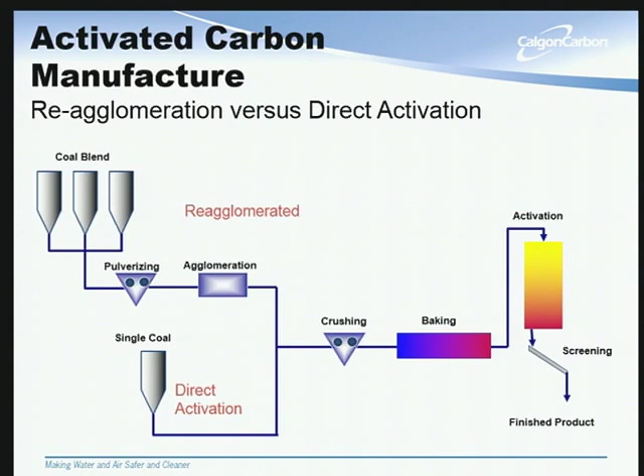And if you think about it, activated carbon is much like charcoal. Has anybody here cooked with charcoal before? Do you put a match to it to light it? It takes a little more than that - you have to put on the lighter fluid. In effect, you're adding the VM back that you drove out in the first place so you can get the stuff to burn. And furthermore, when it does burn, it doesn't go...